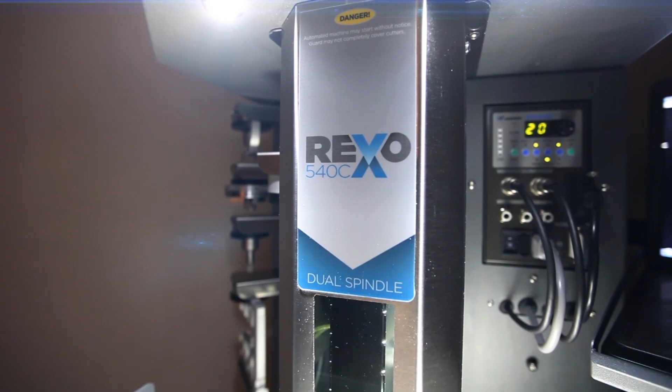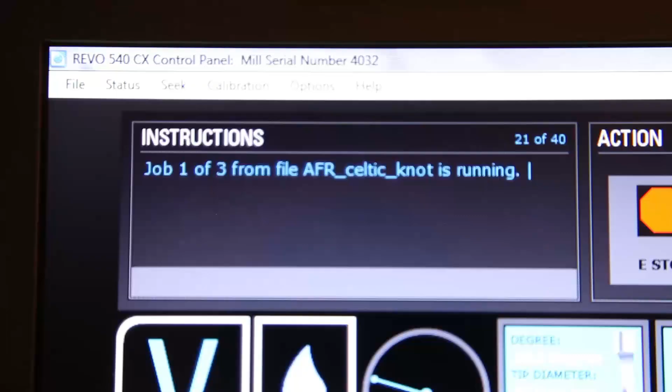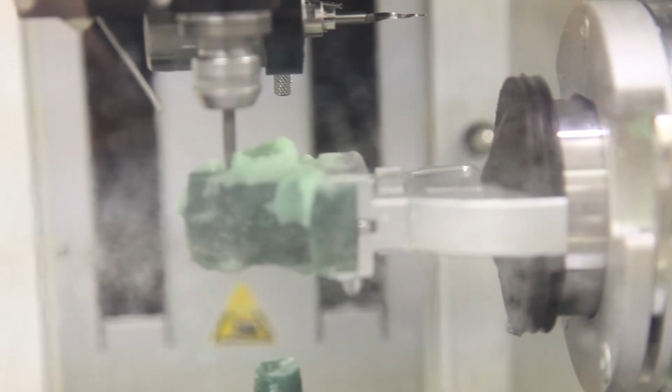Matrix is the three-dimensional 21st century tool that we use in place of paper. We build the model entirely out of what are called NURBS objects, three-dimensional objects that exist in cyberspace. Those objects are handed off from Matrix into the Revo portion of the software, where Revo creates the tool path—in other words, where in space the tip of the cutter has to pass to actually recreate that surface.

It converts that into a set of information that the Revo mill then creates an actual accurate wax reproduction of that model. I've had a few people talk to me and say CAD models kind of look not organic.

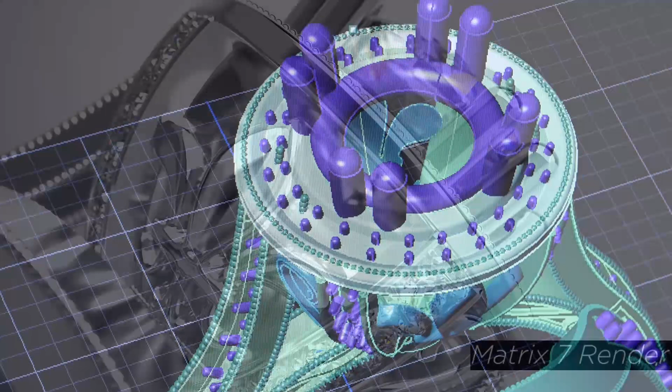They look too blocky, you can tell when they're CAD models. And that was true several years ago when technology just hadn't caught up with the jeweler's imagination. However, if you look at a lot of pieces now that are currently in stores, I can almost guarantee most of them have been made in CAD, and you can't tell.

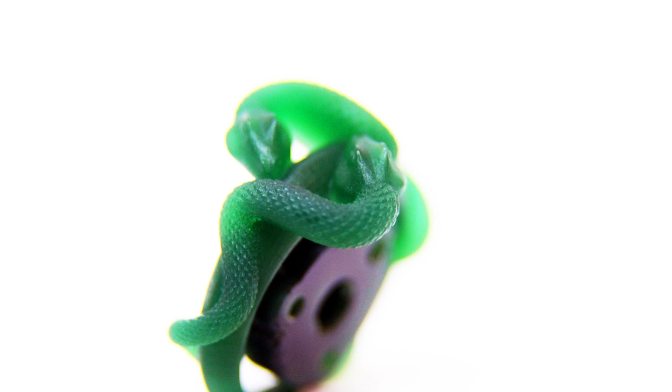I have to say that as customers go, the traditional hand carver is an absolute jewel to work with. They almost always under-expect what the mill can do for them, so that when they start getting really high quality parts off the machine, they suddenly say to themselves, my gosh, I wish I'd have done this 5 years ago.

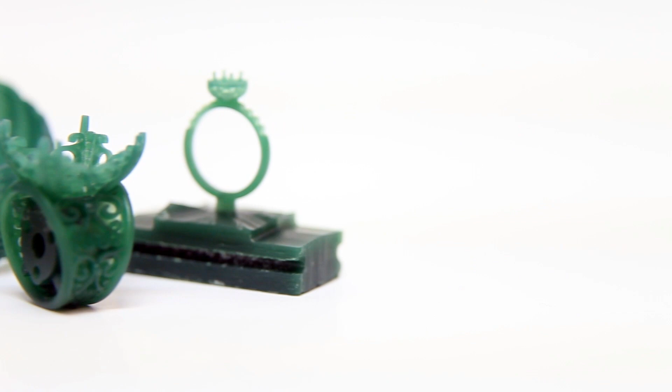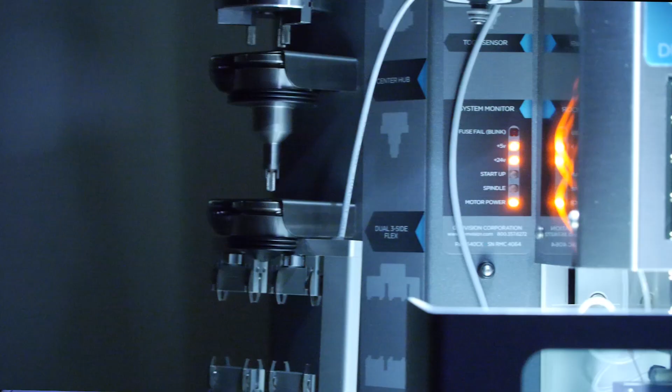Traditionally, milling machines have had limitations when it comes to designing a piece of jewelry. Now, with the Revo 540CX, we've handled a lot of those limitations by adding a dual spindle to the mill. We've added different milling strategies and different fixtures to approach those angles that mills in the past just couldn't achieve.

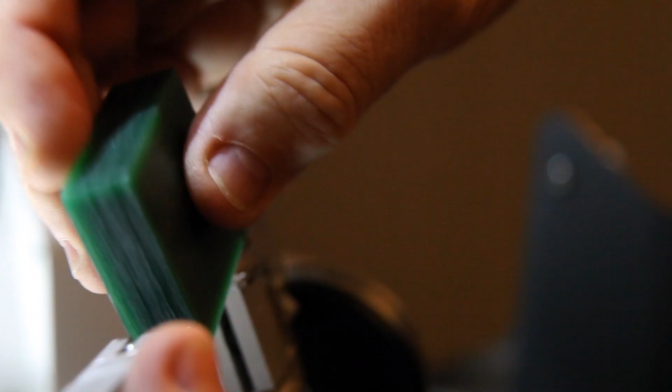The way that the wax is held in the Revo 540CX is that we have created different types of holders that are auto-centering with really easy to use adjustments. So any type of wax that you want to incorporate into the Revo can be held, as long as you have enough area to be able to cut that particular item.

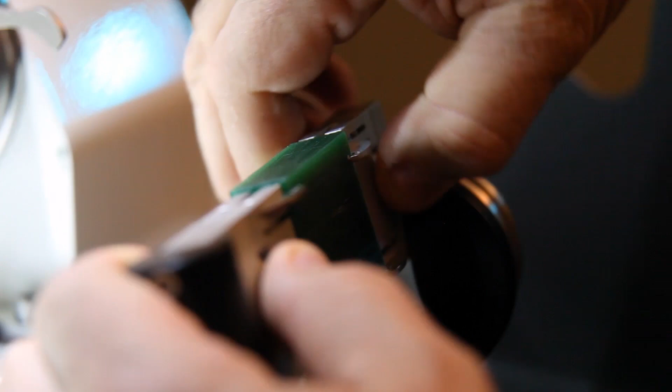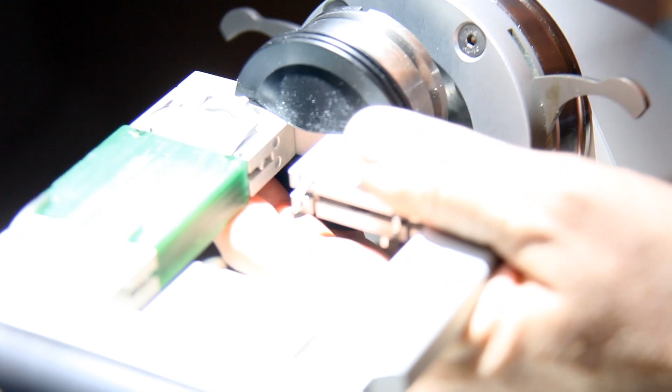The fixtures that we have created in many cases are leading edge and patented to accommodate our milling solution. But the whole idea behind the different types of fixturing is to make it quick and easy for the jeweler to set up and create or cut their particular wax.

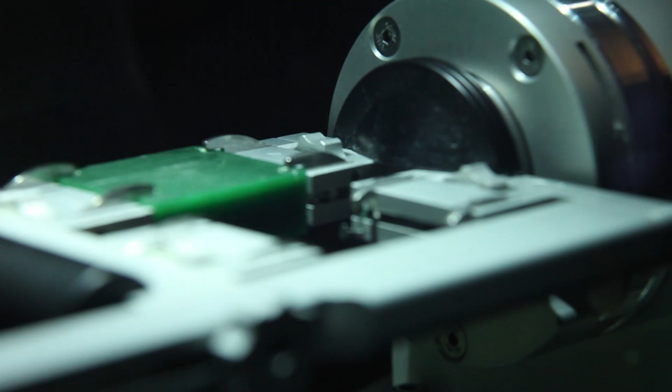There's about 6 to 8 different milling strategies that the Revo 540CX have preloaded into the interface. A lot of times what you want to look at is the type of model that you're creating, and then you can look at the fixtures that may do the best job to be able to create and finish the model to its fullest.

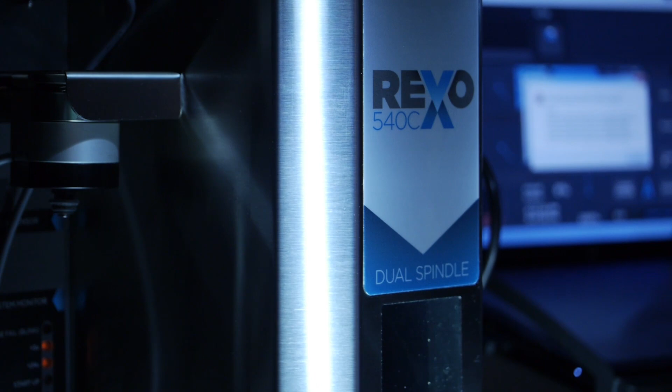One of the great features of the CX is the dual spindle. Again, the base clamp, allowing dual spindles, it allows you to mill detail with less fixture changes, so there's less human interaction, and when there's less human interaction, accuracy tends to go up.

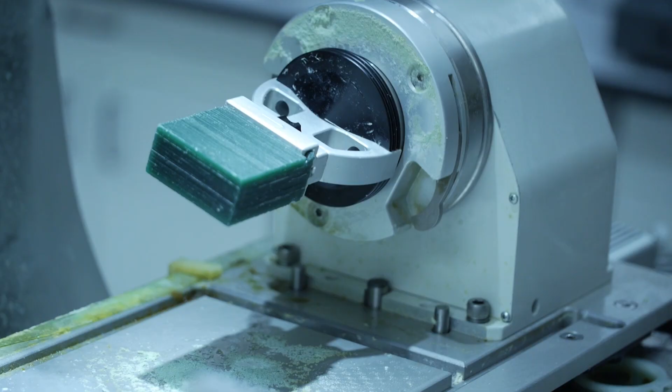Probably the most popular one is our base fixture, and the base fixture literally grabs a hold of a piece of wax like a human hand at the bottom, hangs onto it, and then you work all the way around the outside, work down from the top. Very useful, very close to a universal tool. Of course, the original universal tool is the human hand, and we're still working to copy that critter.

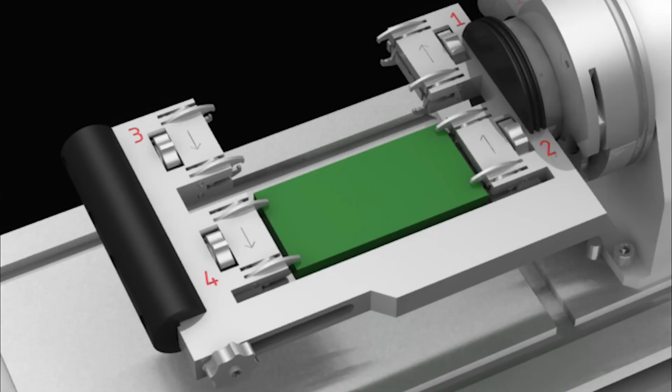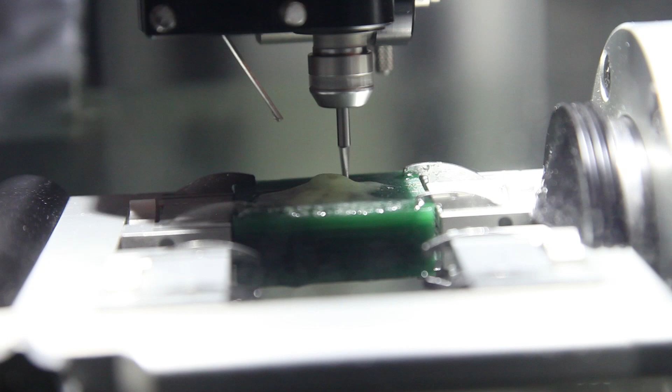The dual-sided flex fixture is really a general purpose cutter for any large and small flat job. So if you've got a simple eternity band, that fixture will do it. If you've got a large bangle, that fixture will do it. If you've got a large cross or some kind of a pendant that you want to do, that fixture will do it.

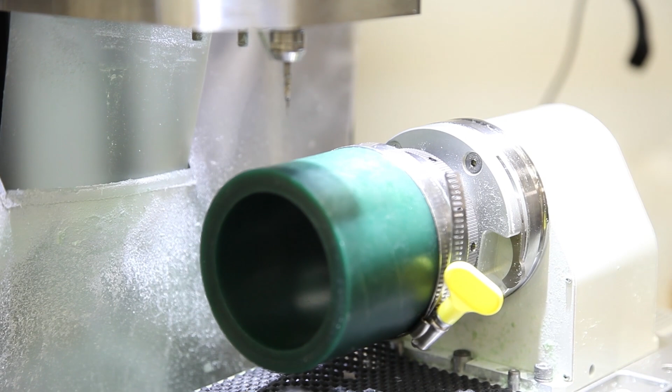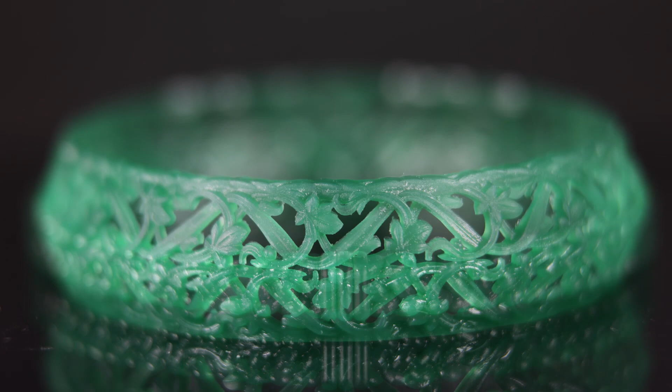Bangles have been an underdeveloped area across the RP industry, so we took the lead to develop a method to manufacture these parts for our customers. We think we've done a really good job. It's still evolving. We're still working with our people in the field to come up with the correct combinations of waxes and tool paths, but we've been able to do some really beautiful work for people.

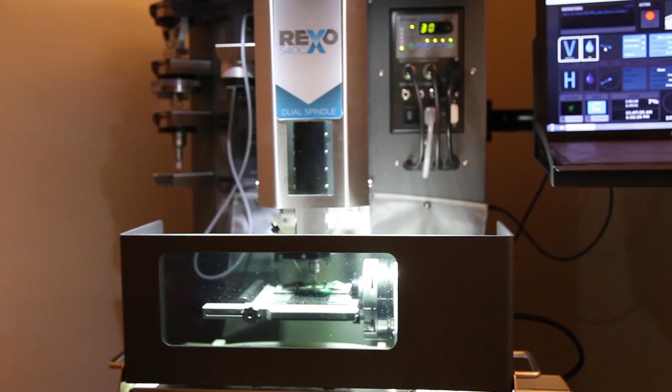It's easy. If you can read, you can pretty much do it. All the instructions are laid out for you. It tells you which number of fixture to use, the type of wax, the type of cutter you're going to need.

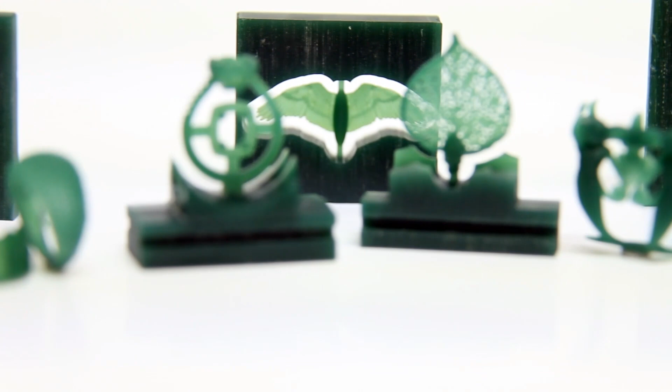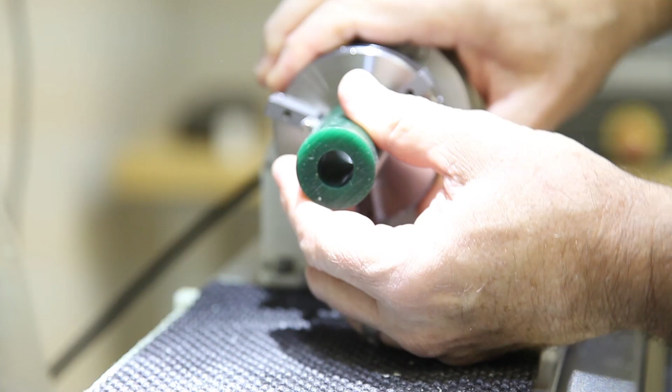It actually primes the pumps and everything for you before you even need to start the job. It's pretty easy. For someone who has been carving wax for years and is already skilled at hand carving, where the Revo 540CX really comes into play is to give you time to free up to do other projects that maybe you didn't have time to do. But also, because of the use of jeweler's wax, you can still come back in after the wax is cut on the Revo 540CX and do follow-up or hand operations on that particular piece of wax as well.

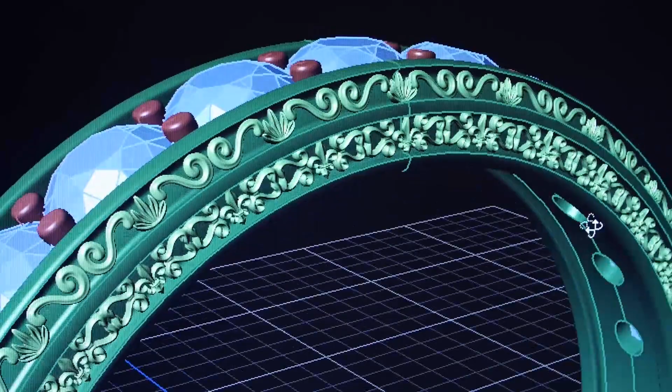For a customer coming into your store wanting an eternity band, it seems like a really easy thing, like a very easy design. But to a jeweler, it's a nightmare, because there's so much math involved in making sure all of those gems are going to fit and all the measurements are perfect. When you're using a milling machine such as the Revo 540CX, the math is 100% accurate for you. It does all of that work for you, and most importantly, while it's cutting, you're doing something else.

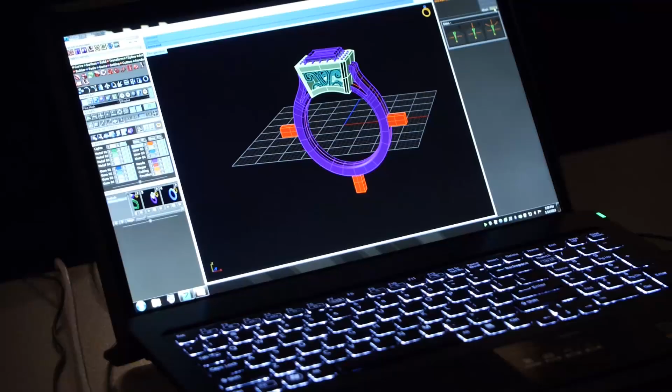Effective milling strategies require knowledge of how to apply those milling strategies. That's where GemVision's training comes into play. Not only do we show you how to operate the milling machine and how to set up a model on the milling machine, we also show you how to approach different milling strategies and why those strategies are important.

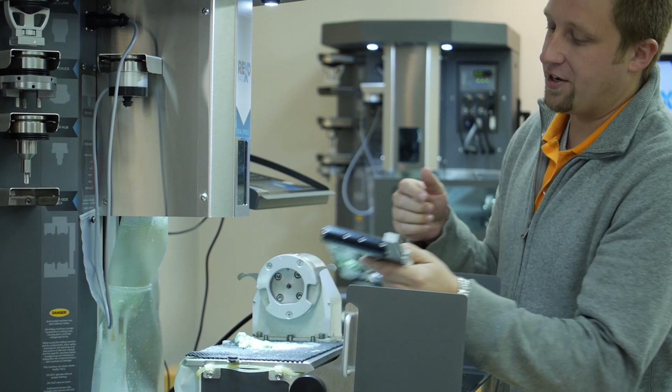When you come to training, you get hands-on experience. We want you to get in there and get your hands dirty, because that's the only way to demonstrate that you know how to use the tools, the only way that you're going to learn it, and that you're going to feel confident in your investment, making sure that it's being utilized to the best of its ability.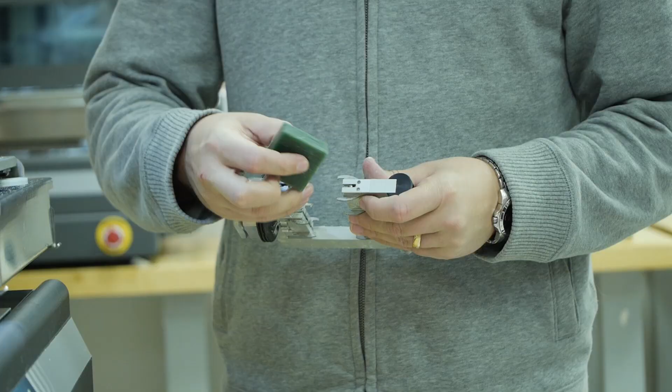We have two training options for learning the Revo CX. We have a primary CX class, which is an independent mill class, ideal for a technician that just wants to learn how to use the mill, or somebody that already understands Matrix who's adding milling technology to the arsenal of tools. Then we have what we call the IMMS class, which is Intro to Matrix and Milling Solutions. That's a hybrid class of Matrix and milling, so you get to learn not only how to design the item in CAD and Matrix, but also how to mill it on the Revo CX.

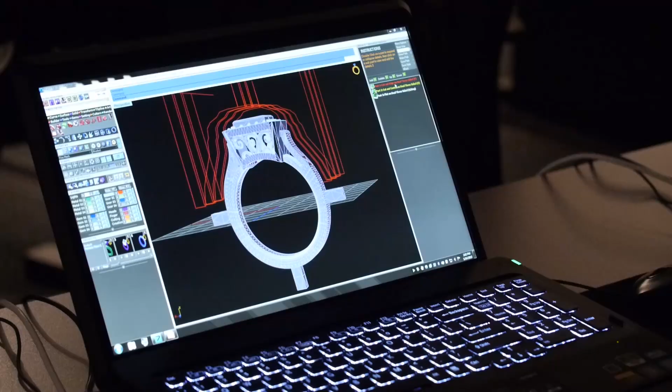When you partner with GemVision, you get more than just a machine. We have a series of ways that we can support you on the product, whether it be through user forums, through email support, as well as a complete technical support staff sitting at our facility waiting to answer questions and assist you with strategies and direction that you may want to go with the machine.

Jewelers have been utilizing jewelry wax in many different colors for years and years and years. Therefore, when you go to cut and produce that particular wax, you're going to be guaranteed results just like you would if you were hand carving that particular piece of wax.

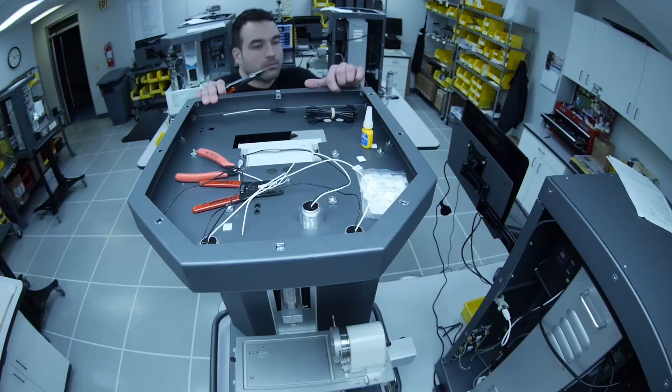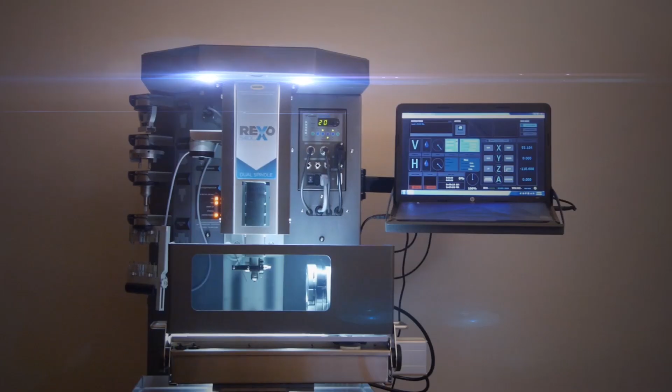The quality of the internal components of a Revo 540CX are top-notch, pretty much second to none. They were sifted through and chosen specifically for what we are doing. Innovation, ease of use, and reliability. The Revo 540CX is the leading choice for both small and large jewelry manufacturers.